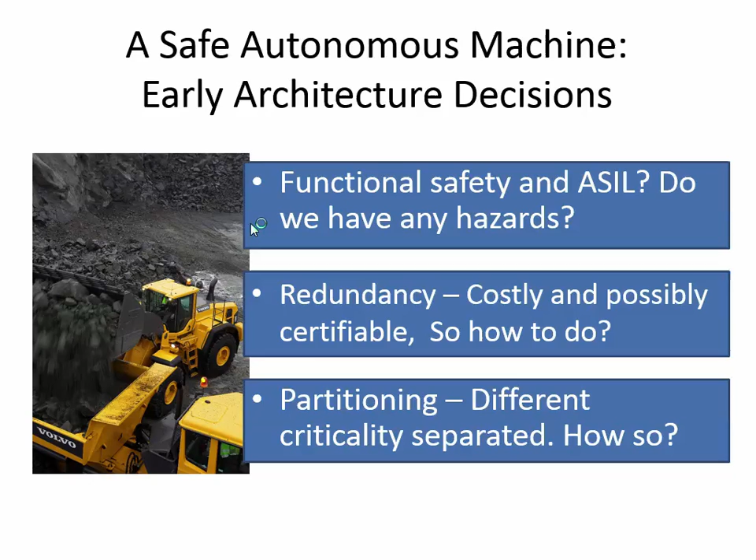Okay, so in this presentation, I'm talking about three things. We've done three things: we've mapped out the autonomous hauler application.

We use case model the whole thing to see what's actually happening in a hauler's workday - or it's a person's workday today, but it will be the hauler's workday, hopefully.

We've done a preliminary hazard analysis for this precise application, mapping out which hazards exist and which ones are most critical.

And we attempt to do system architecture synthesis of this. We try to come up with basic ideas about how the architecture will enable us to certify it later on.

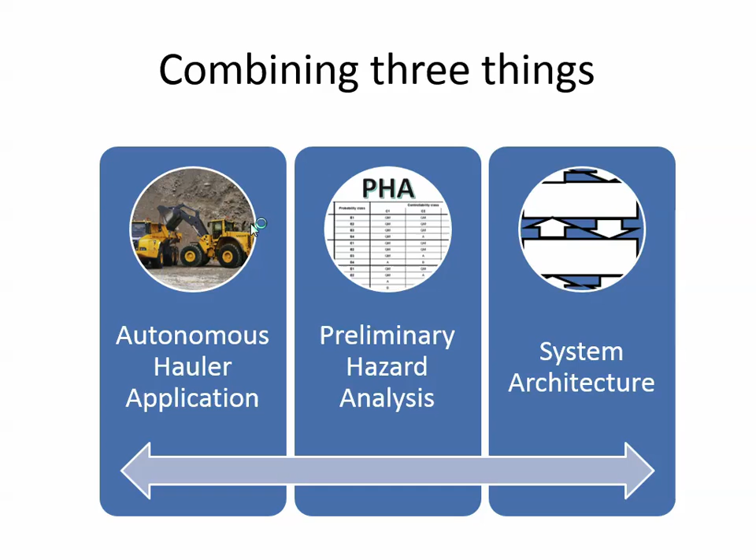Okay, this is what we've done.

Autonomous scope and usage of the hauler - we've made a logic function block architecture from that. Just the logic functions that have to be there, if it's supposed to be enabled to tip and dig and drive around the site like Volvo intends it to. We have that transformed into a logic function block with a number of functions, and by analyzing those, we can find out which ones are hazardous.

We've used the hazard analysis methodology from the ISO 26262 standard. That's an automotive standard, kind of new in Europe. I'm not sure how it works here, but it's something similar. I know in Europe, if you have a product and want to put a CE mark on it, and it's a machine type thing, then you have to follow the machine directive, which dictates that you have to follow some of the functional safety standards. This is one of them. There are others, and they're similar.

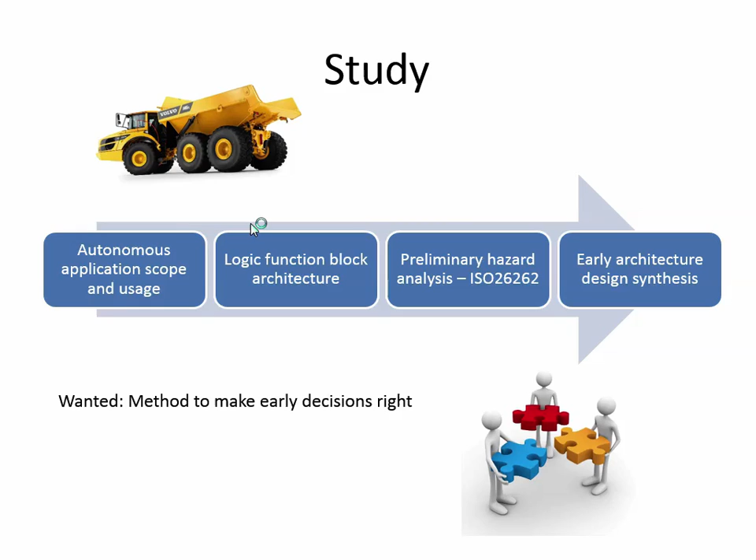This is getting big. There are many possible applications of this, and it's not one size architecture fits all, because you really have to analyze your own system use to be able to make the wisest decisions on your own architecture.

The point is that you have to find out your own application, map it out and understand it properly, especially if you want to safety certify it. The safety certification is a large portion of the work, and it's wise to do as little as possible.

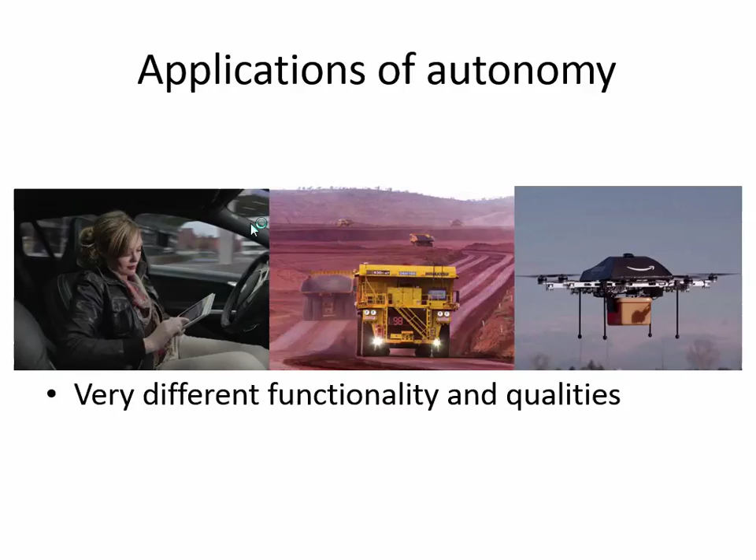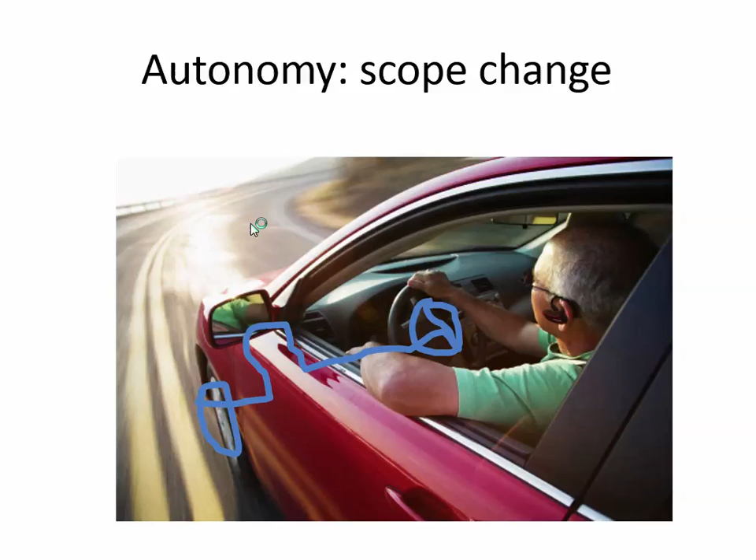One important feature with autonomy is the scope change when we look at functional safety. Today, we have to certify our products - a normal car, you have to certify that it doesn't fail in such a way that somebody gets hurt. For instance, the steering wheel: it's not okay that if the road is somewhat turning, and it suddenly was going to steer in another direction, it would probably be hazardous. So certifying this system is about really assuring that this blue function, which translates the steering wheel's movement to the wheel, is working.

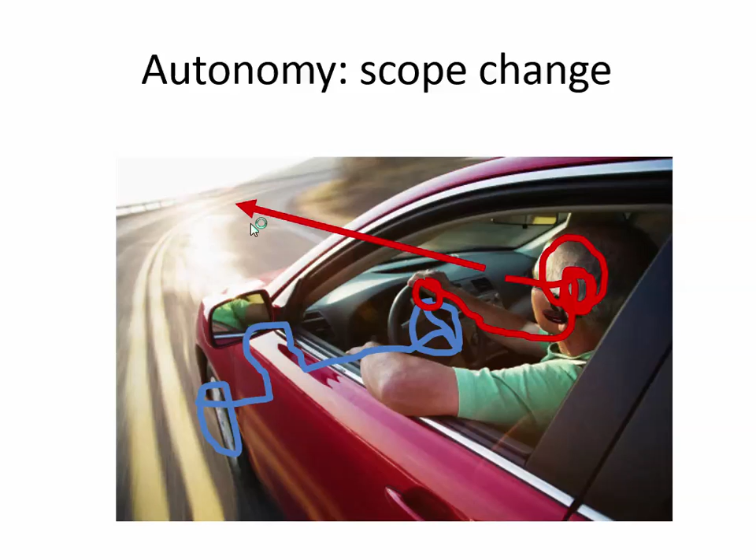But when we consider autonomous vehicles, there is a scope change. This in red is computer-generated functionality that also has to be assured for functional safety. This is a human today, but when we consider this an autonomous system, then the seeing of the road and the perception of all the objects should also be functionally safe. That means probably we have to see pedestrians and other things, and translate that into decisions of how to control the steering wheel. That is in addition to the blue type of system we have today.

Okay, so we looked a little bit about the automated hauler application.

I'm a computer nerd, I like new things. I'm not a nerd, sorry, I'm just a computer scientist. But yeah, whatever - this is really fun. It was fun to have a go and look at these machines working.

We've looked at a typical quarry type application. These machines are general purpose machines - they can run in building sites and stuff, but material handling and quarries are very important. There are many of them. So this is our scope.

What's important, the most important quality attribute is uptime - it's supposed to be production all the time. What's happening is that they're loading and tipping, tipping into crushers and making different granularity of rocks, and putting them in piles, and that's the production. Then they get customers and load this material onto trucks.

What should happen, what will happen is that nobody's in the vehicle, nobody's in the machine when it's operating, but there has to be somebody like a site operator at the control desk. So that's a new type of thing for the usage of this system.

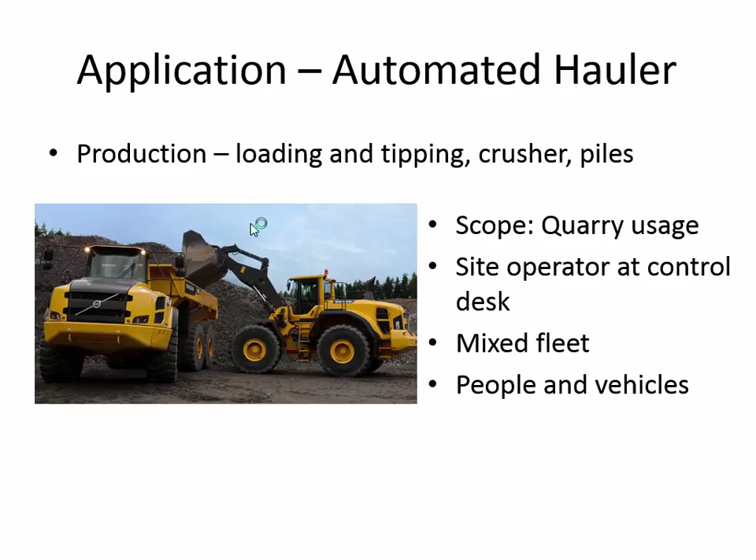Okay, so far we have mapped out the application about an autonomous hauler, what it's supposed to do and not do. Now we get to the preliminary hazard analysis. A little problem here is that Volvo and the other companies are sensitive about these types of hazard analysis, so I'm presenting an example.

You assess it with these three parameters: severity, exposure, and controllability. So for instance, if you have a function to see pedestrians, detecting pedestrians, perceiving that there's a pedestrian around the car. The hazard is you could have a fatal collision if you just don't see people around you.

So the severity, there's different grades of that. That's a possible fatal, S3, the toughest one. And exposure - there's not people all the time around it, so it's not the highest exposure factor. But it's very low controllability, it's a C3. It's basically difficult to jump away if this 50-ton machine moves towards you.

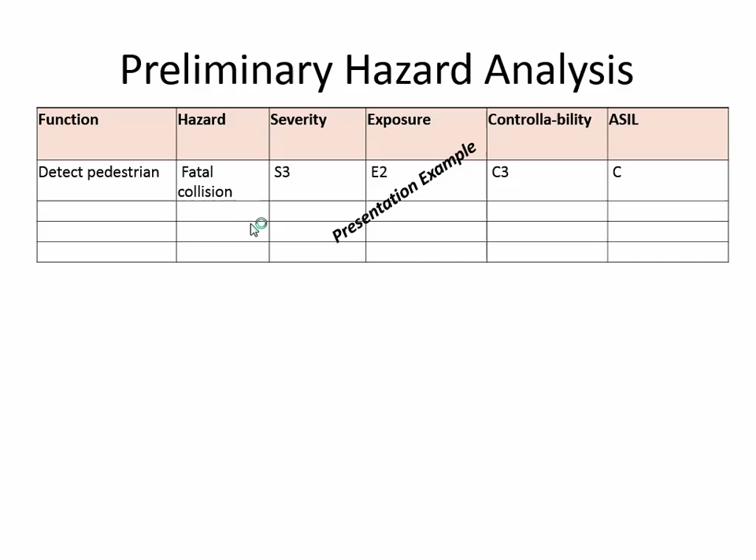Okay, so we do this for all the function blocks, and we end up with classified hazards for all the functions. We have about 100 hazards classified when we've done this. We can, if we don't detect pedestrians or vehicles, we can collide, and if we fail to tip our load properly in pockets, we could injure people.

Okay. I should say something more. This whole standard is when you design a system, there's a lot of work to do to follow the standard, and it's all based on process requirements. You have to do a certain type of documentation and certain hours of testing, lots of stuff, and it all depends on this ASIL level.

If you have a lot of ASIL Ds, you will have to do a lot more process around this product. And it's considerable. If possible, you want to have a useful product without so many high integrity levels. That should be preferable, because you know it's going to cost you.

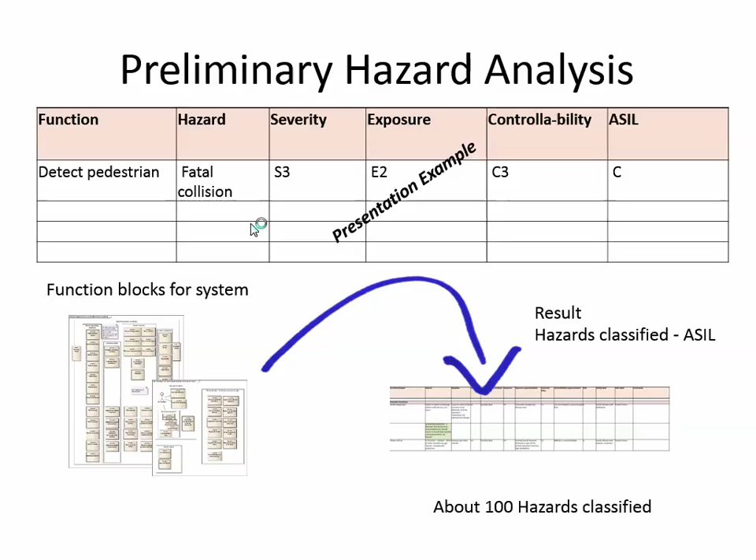And thereby you want to reduce that cost. The standard provides ways to do decomposition, and it means to use redundancy.

If you have an ASIL D function, you could do it as a single channel function, but you will have to test it a lot, and you will have to document a lot of things. You will have to prove that it's beyond doubt works.

Or you could, if you have an ASIL C function, it's fairly difficult and costly to certify it. You can reduce it to 2 parallel systems, which you're then allowed to treat as an ASIL B and an ASIL A, which is considerably lower requirements on. So it could be, for instance, an ASIL C.

If you have an ASIL C, you have to have external assessors coming to your organization to check if it's fine. If you have a redundant system with an ASIL B and an ASIL A, which the standard allows, you could maybe have an easier setup, more enabling your own organization to work efficiently.

So these types of considerations are important. And it's important here that in safety consideration, this is the only reason that you do redundancy, so you do redundancy as a way to enable you to certify your system. It's not safer, not in the eyes of the standard.

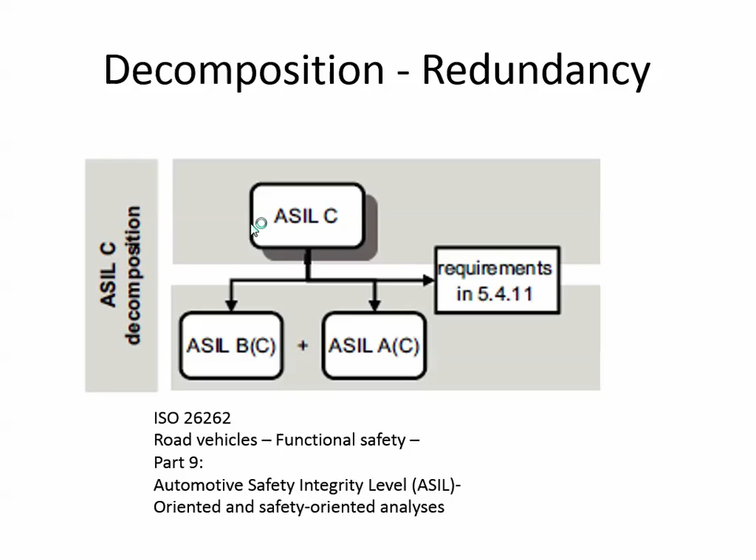Yeah, I think at least this standard, some other standards are not so clear, but this standard is very clear, I think, about it - it has a whole section on how it allows you to do this ASIL decomposition, how you do that.

So, okay, now we get to the last point. Now we did the application and we did functional or preliminary hazard analysis. Now we get to architecture from an autonomous system. This is from a reference framework of how to do autonomous decision-making software.

For starters, if we look at this system, we just need to have a world model about what's happening around us. To do that, we have perception functions to see what's happening around us. And based on that, we calculate the behavior - how should we drive?

Where should we turn the wheel? Where should we lift the bucket? Based, of course, on what mission goal we have - if we want to tip our load on a pile.

And then we have the real world, and the action is probably, hopefully, the action turns out that the pile turns out the way we wanted to, and by sensing it, we sense that we get the right 3D shape of it, that was our mission goal.

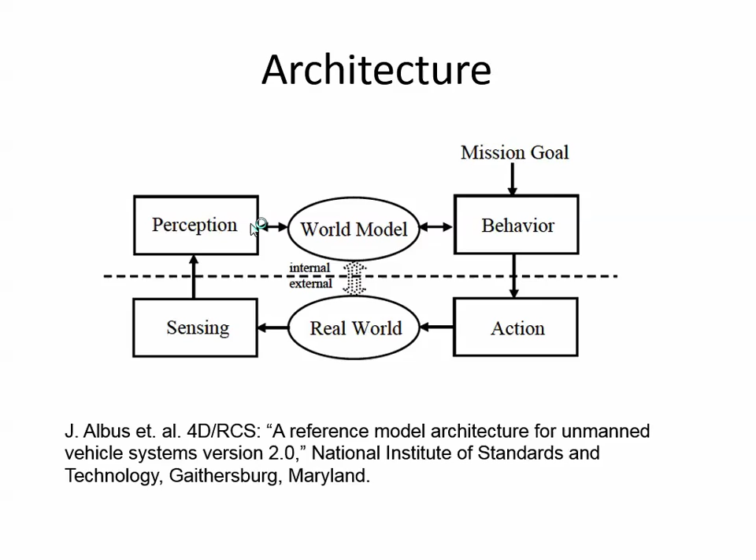Okay, this is just a way to separate the software functions. And now comes the trickier part.

These models, all of them, are used in different levels of a decision stack. The same type of model that we saw here is implemented in each layer of a decision stack. And the idea is that on a high level, we have high-level abstraction about how many vehicles are moving, and at the low level, we have the control functions for how to move the actuators. And there's everything in between.

The standard doesn't say exactly what these levels should be - you can do that yourself, depending on your own application. But on a high level, it's a long time frame, perhaps several minutes ahead, and at the bottom, it's the control functions.

And to the left, we have sensor fusion - all the sensors get merged in with clever algorithms to detect people and to detect whatever is around us. There's also a map involved. You can get data from a map that says where you have your piles and where you have houses and forests and roads, whatever.

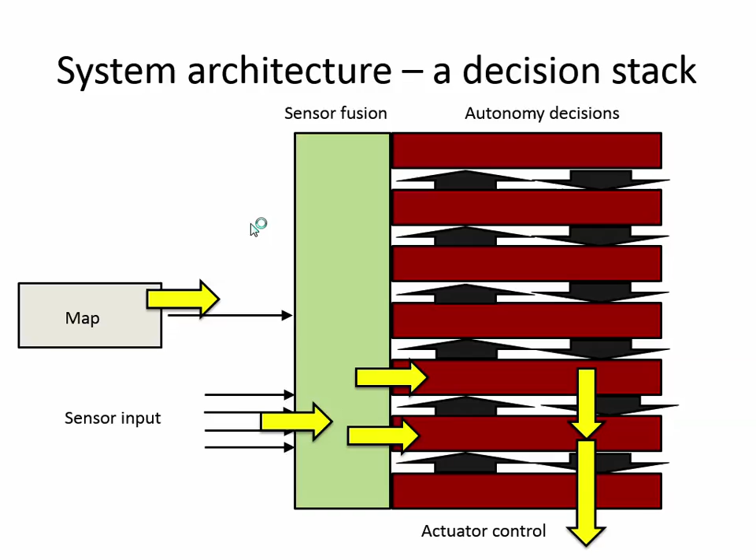Similar to an autonomous car in traffic. So when it runs, there could be input coming from the map saying that this is where the road is. We have also sensor input saying where other cars are or other machines, and there is sensor fusion processing going on, and it ends up with actuator control to steer us in the right direction, and to tip the bucket if that's necessary.

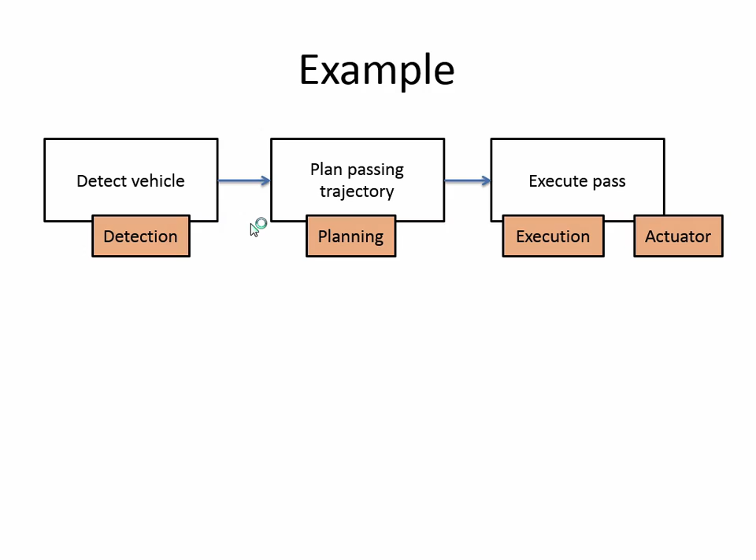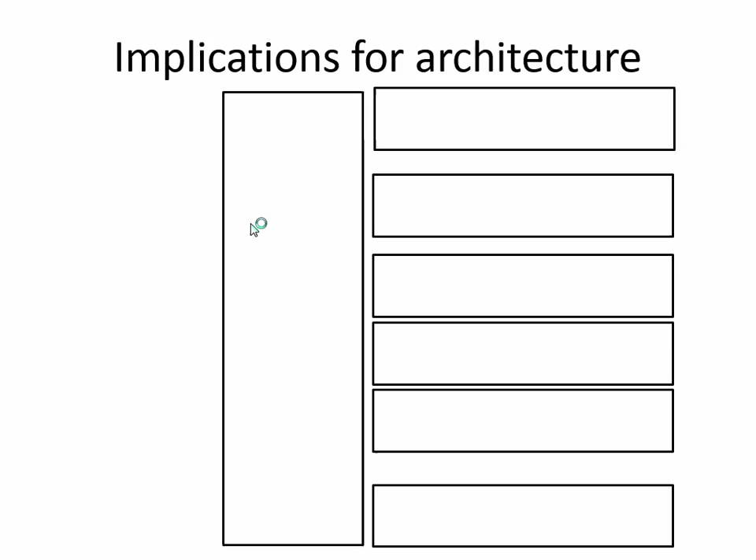So an example - detecting a vehicle. We need to detect it. There's a function to plan a trajectory where we should drive, and there's an execution of that. I can't show you the exact functions, so I just classify them into detection, planning, execution, and actuator functions, because I want to show how this makes some implications for how to build this architecture.

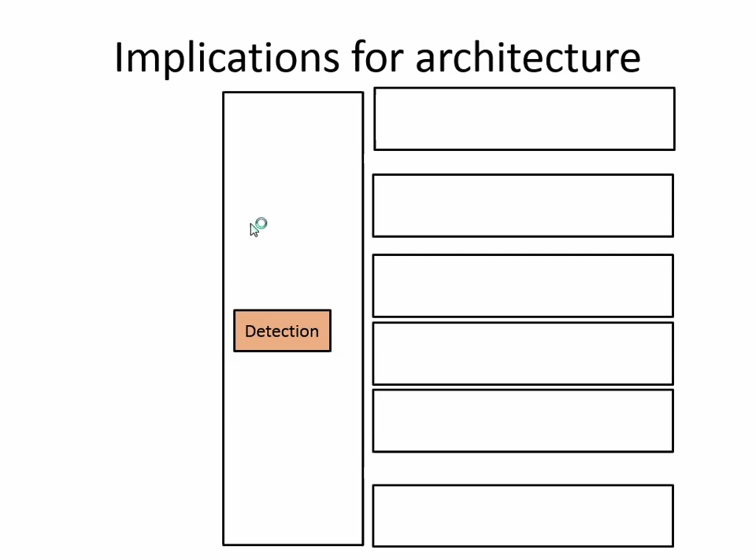Detection functions are in the sensor fusion part of things. It seems reasonable, and it's fine.

Let's skip out the analysis. Then we have planning functions and we have execution functions. We plan a trajectory where we're going, and we have an execution of that trajectory. It's for us, for certification purposes, we should...

It seems to be a possibility to just keep a limit on the stack and keep these functions as low as possible, because if we do, then all the hardware and software functionality below that level will require us to do all this extra process to assure safety. And we can probably use a more normal development process for the stuff above that, which seems to be a good idea.

We also saw in this study that a lot of the lowest level, the actuator control, is really hazardous. It's involved in all the movement of the machine, and it seems there could really be a super high safety integrity type of system at the bottom to allow us to have actuator control. Let's keep that on that one.

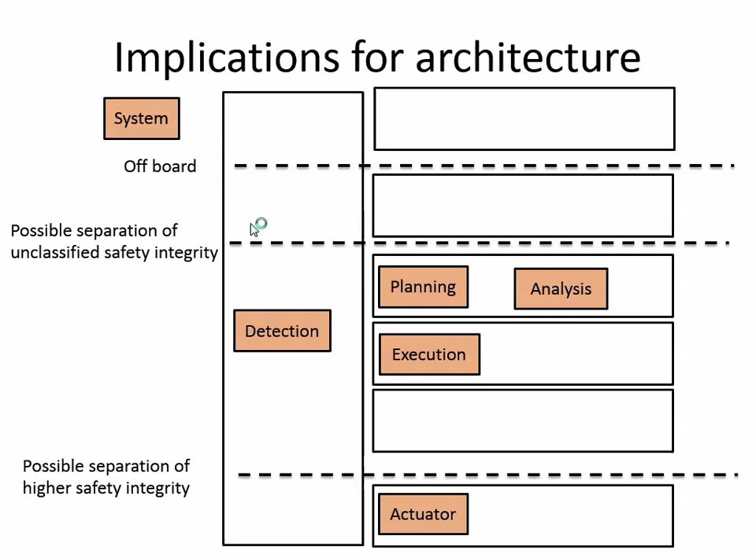One conclusion from this is that redundancy seems to be very applicable when you look at the perception side of things. If you remember the detection functions, there you can make redundant all the sensors and stuff. But it seems really difficult at the behavior level, when you have a decision-making algorithm - it's not necessarily a good thing to make it redundant.

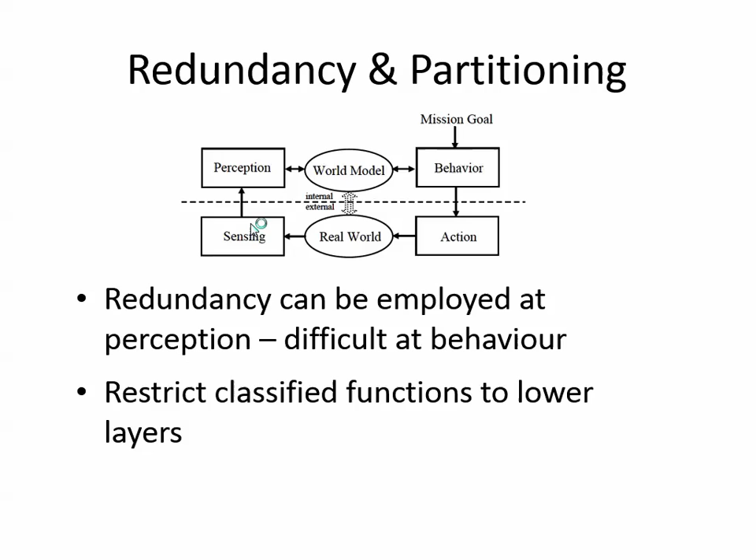It seems just complex. And there is a possibility to restrict classified functions to the lower levels, layers, and that seems wise. So it's not a super strong conclusion.

It seems very reasonable to do a PHA early, and it can aid in your architectural decisions. It doesn't tell you everything, but it's fully possible to do it very early, and it seems wise to do it that early. You get some guidance on how to separate critical subsystems and how to apply redundancy to enable you to certify the system easier. It certainly seems best suited for the perception functions.

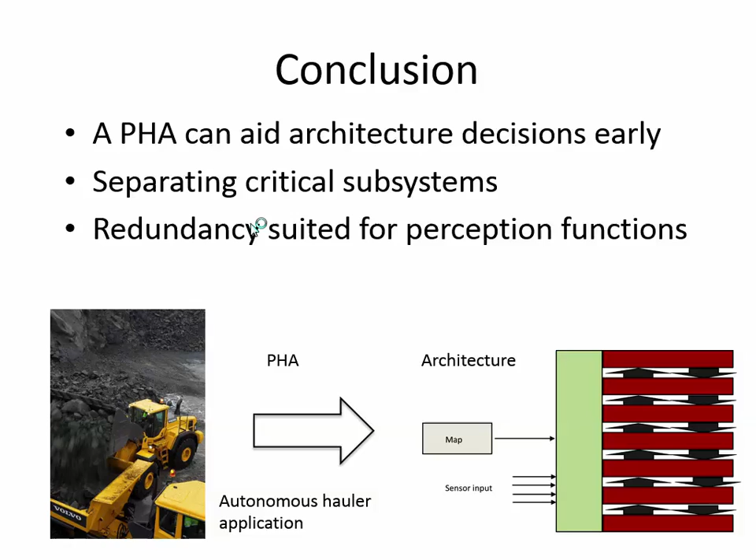That's about it for me. Thank you. We have a few minutes.

It seems that working in a quarry or a construction site is kind of an extreme environment. So what I didn't see, and I'll ask, is the health of the sensors. Do you factor that into the system that provides the safety? Most systems with sensors have a built-in test functionality - is each sensor functioning properly at any given time? And obviously, if I don't have properly functioning sensors, the quality of my decisions is going to drop. So can you talk about the hazards - mud, dust, rocks from a human-operated machine breaking a sensor - and how you work that into your calculation?

It really seems to be a hard problem in this context, because it's very, very dusty. Even if you instrument all your sensors so you detect when it's covered, too dusty, dark, rain, or muddy, then you'd end up with a system standing still a lot of the time. It's safe, but not very useful. It's a whole other dimension. I'm not an expert on this, but those people tell me it's going to be a problem, and I haven't talked about that detail yet. We're not quite there yet, but it's certainly a concern that will have to be addressed.

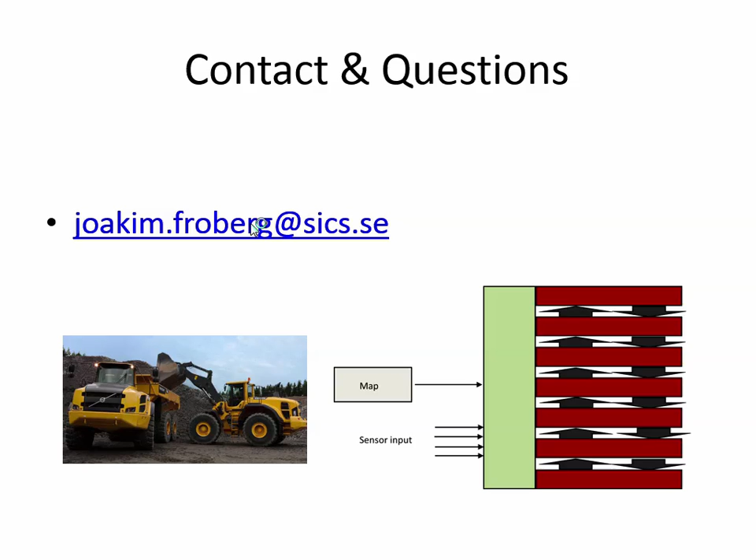It can. Thanks for hanging around, thanks for the presentation. Thank you, guys, enjoyed it.